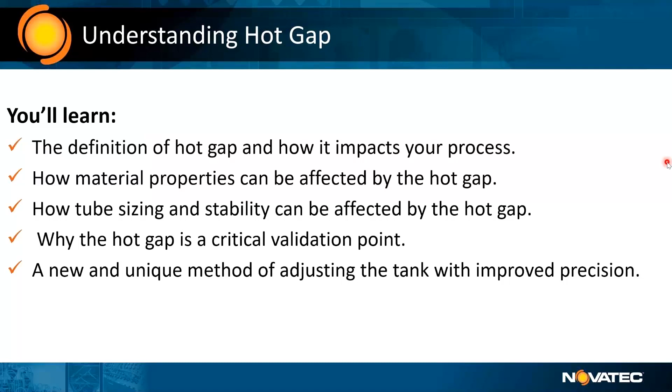Can die sizing or land length affect hot gap spacing? So Larry, when the die land length is longer versus very short, how does that affect the spacing that you might have when we're looking at this gap? Well, the land length will determine the amount of swell that the polymer sees, the memory effect of the polymer as it comes out of the die.

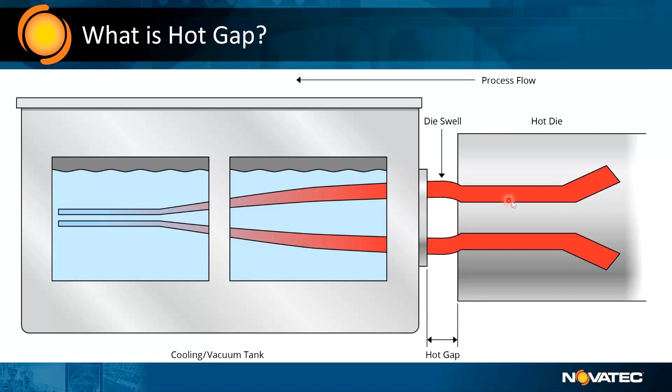So normally there's an acronym that's used called land gap ratio that you would use in your calculations to determine how much land you actually need to ensure that all the other work you did on sizing your tooling will actually work. And again, we all know that distance from coming out of the hot die gap, we've seen people be very close or be further away, depending on the drawdown, the temperature of the plastic, and the material itself.

Well, yes, your die size will determine basically what we used to call an angle of attack. So again, this is one of those things, as I mentioned before, in making this process more of a science.

That's why understanding your material, the temperatures, every part of the die, and thus the relationship of the face of this die to where that tube first enters the water is a critical point. It will set up the properties of your tubing.

So with that, Larry, why don't we really quickly go through some material considerations and whether we're free extruding, non-contact versus contact sizing as far as the distance, what we call this hot gap. Well, your distance is going to be predicated on some of the normal calculations that you see for tooling. So your area draw ratio, your direct draw ratio, as well as your draw ratio balance will dictate what your natural tank position is.

So depending on how you want to set up your process, in a free extrusion, if you want to ensure limiting or slowing down the cooling, you may want to move your tank out further, as well as change your water temperature. Non-contact vacuum sizing is similar in that respect. And contact vacuum sizing, depending on the application, most of the time you want your balance to be pretty straightforward so that you're not using any internal air support. And once again, whatever that balance is will dictate how far out your tank is from your extruder.

And one thing that we know from years of experience, people moving from free extrusion and then going to non-contact or especially contact, is that the tooling will change. The die, the pin and the bushing will be a different size. If you try to use the same tooling you use for free extrusion with a contact calibrator sleeve or plates, that drawdown ratio is going to be different. And not only that, but this hot gap is going to be different.

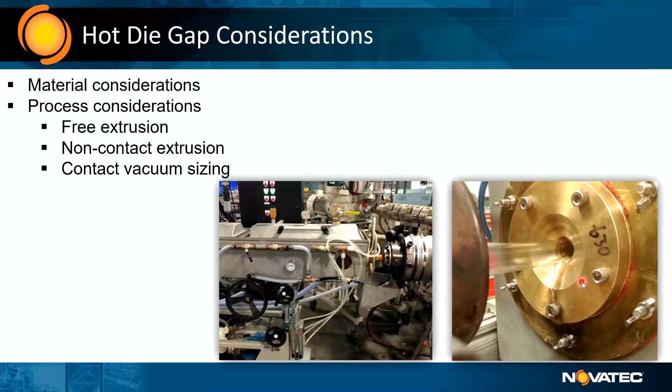In many cases, in calibration, where you're actually making contact between the tube and the tool, the hot gap is very short. Sometimes the face of the die is all but touching the front of the calibrator. It can be, certainly. So Larry's going to specifically talk about the material properties and how this hot gap can affect the elongation, the modulus, the burst strength, whether you want crystalline versus amorphous, and even the tube surface finish, whether it's smooth or matte.

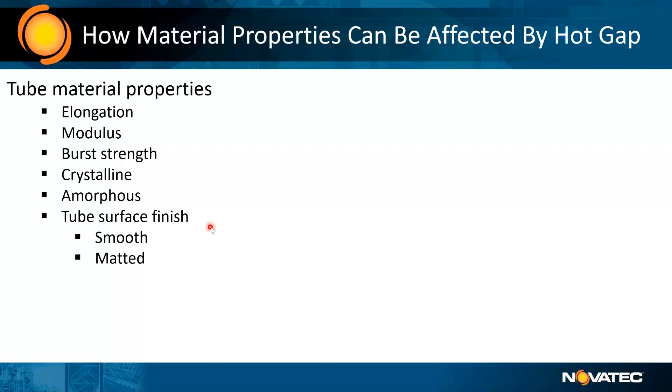Well, in general, the cooling rate is going to determine the elongation, the tensile values and the Young's modulus of the part. So you want to be consistent. You may not even have a specification for it, but you want to be consistent with what you do and what you produce, so that downstream processing doesn't have anything unexpected happening. So basically with elongation, you're pulling it from the die and drawing it down, and the more you draw it down, the better your elongation gets.

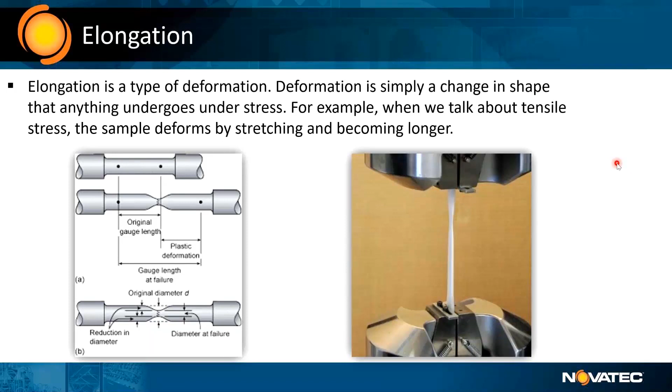Well, the more you draw it down, you can lower your elongation. Okay. You're aligning the molecules in the extrusion direction, just like they would with fishing line. They want a lot of strength in the pull direction. Whereas with burst strength, you would actually reduce that effect and not orient the polymer chains in the extrusion direction as much, so that you get more force applied from the inside.

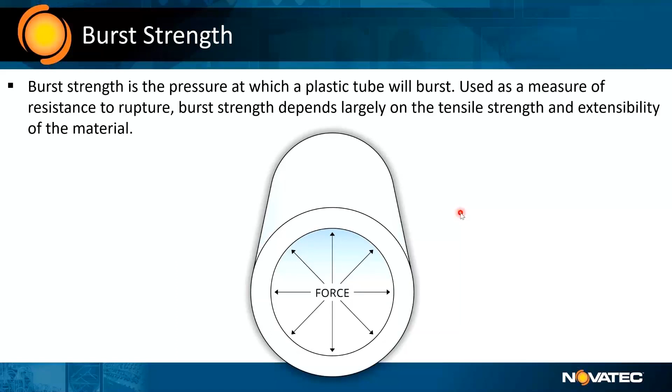So for burst strength, you might want to have very little drawdown and possibly be very close to the die, whereas for elongation, you might be further away. That hot gap is going to be longer. Maybe. It depends on the application. Yep. And then modulus? Well, the area of deformation and the modulus of the tube will move along with the properties. Most people will discuss ultimate, but modulus is not an ultimate value. It takes into account the yield portion of the curve underneath it. So it will certainly affect that value.

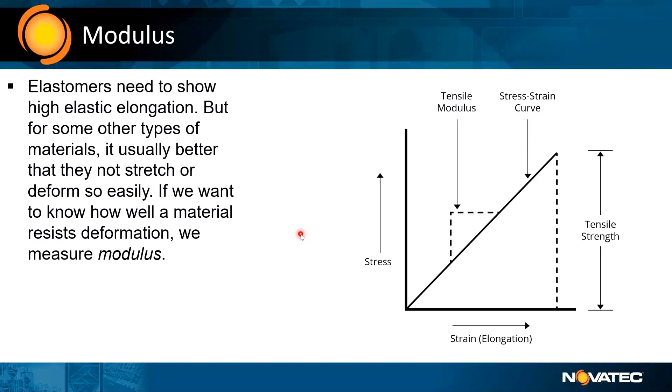Very good. And something that I know is of a lot of interest, especially in some of the materials, some of the nylons, some of the PEEKs. If you could just briefly explain amorphous, especially in medical tubing, versus somebody wanting semi-crystalline. Well, pretty much all the polymers are semi-crystalline, and usually if you wanted to maximize either chemical compatibility or ultimate strengths, you would want to maximize your crystallinity.

And to do that, you slow down the cooling rate. So normally you would have your tank out a little bit further. You might heat the water. Depending on the application, the water might have to be over the glass transition temperature of the material by a certain amount.

And you want to cool it evenly as well. Right. So when somebody is looking for an amorphous material, they might have it coming out of the hot die with the gap very short, and run into the water very, very quickly. So they're not really cooling through the entire wall at the same speed.

So they're almost shocking it. Right. There are a lot of components that are made where, with downstream processing, you'll build in the crystallinity needed. But you need the amorphous state, or more amorphous state, to be able to process them. And again, for semi-crystalline materials, one that really comes to mind is PEEK, and we do have a quick video on the next slide that we'll be showing. It's good to remember that air is 10 to 100 times slower at heat transfer compared to the medium of water.

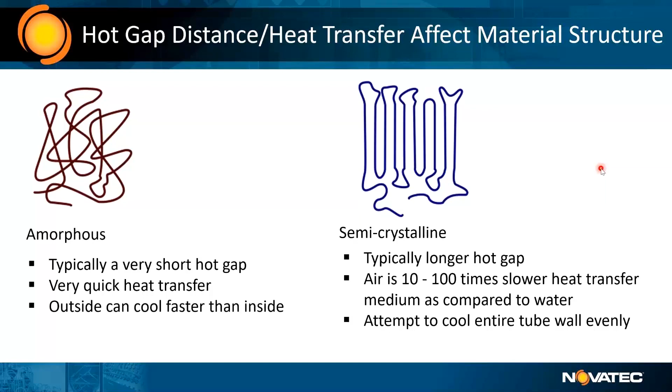So one of the difficulties always comes when we get such a big air gap. That distance is the problem, supporting that part, and controlling it. Yes. So with that, we'll watch a slide, and Larry, if you could just walk us through.

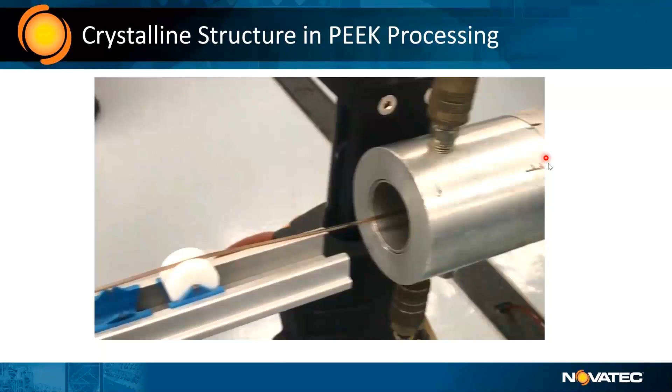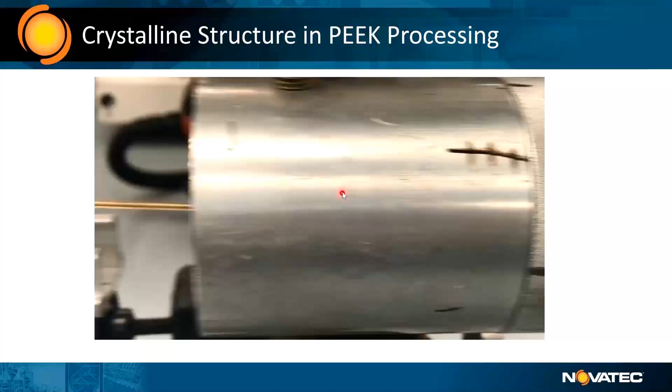This is a PEEK extrusion that is air cooled, and PEEK, luckily, is one of those materials where you can see when the crystallinity occurs, where it goes from an amber to a gray coloration. So this is kind of a normal setup for PEEK. It does make it a little bit more difficult to control when you do this. But look, you can see the frosting, and then see it changes over to the crystalline state. Yes. Beautiful.

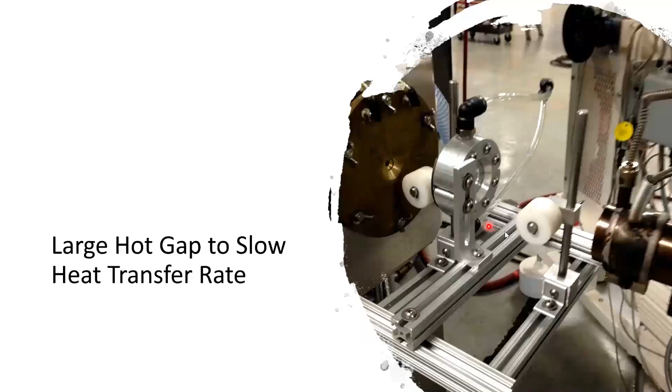And this is more of a very typical setup, might also be PEEK, might be a relatively thin wall, because this gap might only be 10 to 12 inches. And in this case, they've actually put a small air ring to blow some air on it, and some rollers for support. But again, the measurement between the hot die face and the point at which, in this case, it's going into a calibrator, this gap should be a repeatable position and recorded.

Absolutely, because along with the line speed, the amount of time it takes to get to that point, you still need to be in the proper state for the contact vacuum calibration to actually work.

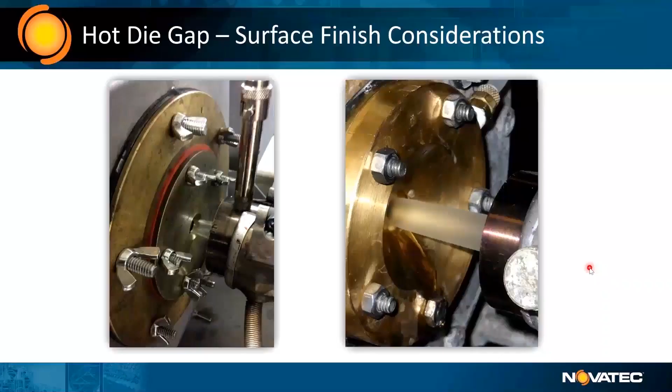And Larry, if you could quickly discuss this gap also, as well as some other things that can affect the surface finish. Well, some polymers, high density polyethylene being one of them, like to actually see some air cooling before it comes into contact. I've actually had some contact applications with high density polyethylene for dilators where your tank could be out 10, 12 inches.

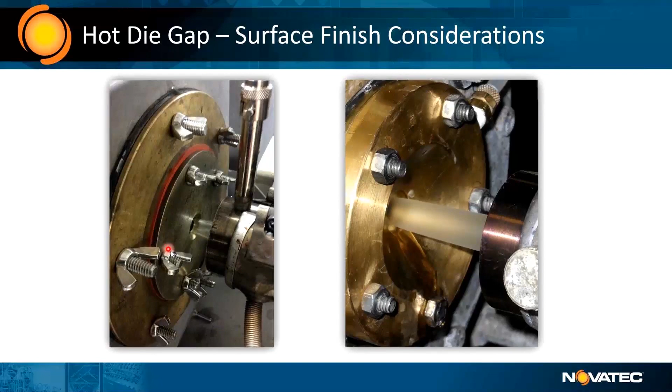Other materials prefer it to be closer, to minimize the air gap, so you're capturing more of a molten state. But obviously, we're concerned today with this air gap in making a measurement, because we want to keep a process consistent and record all these variables. But we know that this is a very important variable.

But along with this, you mentioned to me yesterday that melt temperature can affect this. Absolutely. So, viscosity, melt temperature. Again, the idea is to record as many of the potential process variables as possible. So not just this air gap, but in this case, the melt temperature, the screw RPMs, everything should be recorded.

And Larry, we've talked, and you and I have been working together for at least 35 years. The normal method for moving a tank back and forth, we've talked about how critical this gap is in making medical tubing. Actually, how close do we need to get if we're trying to record every variable, and we want to record and possibly validate what that hot gap distance would be? What would be a typical variation, or how much would you allow? Would you allow 10 thousandths, 20 thousandths?

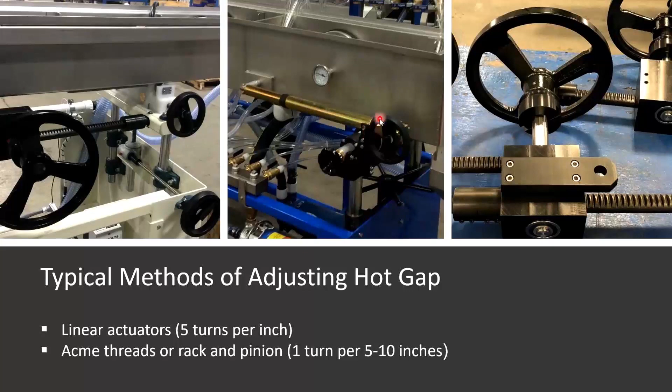So we're going to quickly show you where we think the industry is heading, because we feel very seriously that this just is not accurate enough. A lot of times these handles are wobbling, and you can turn a quarter turn or go the other direction, and there's no tank movement. It's just not precise enough.

So for that reason, we've experimented and actually put on a servo actuator, because we wanted to be able to pre-program repeatable positioning of the tank in reference to the zero of the die. So we know from the face of the tool how far it is and where exactly the face of the die is, where we want that hot gap position to be, and be able to program that, along with a string-up or startup position and a home retract position.

We did actually add a fast retract, and we'll talk about that. So if all of a sudden there was a jam-up, we want you to be able to hit a button located in a good position so it can quickly go back to a string-up position. We don't want people just shoving the tank out of the way. We're doing a precision process here.

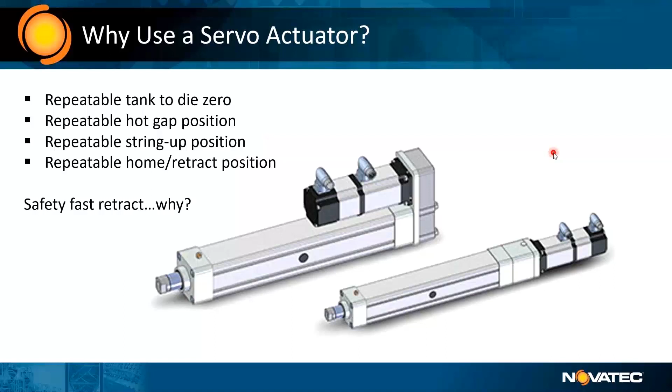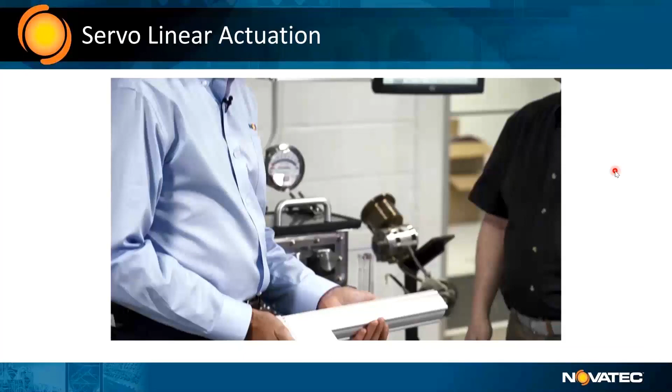5 thousandths, or even 10 thousandths at a time. So we've removed this feature because we felt it was absolutely inadequate, and with that, we replaced it with a servo actuator. So Larry's going to demonstrate how we now move this tank with a servo actuator and not a hand crank.

Sure thing, Bob. Right now, the position it's in is for stringing up, and we have a preset hot die gap. So once you actually string the product up, it's basically the touch of a button, and it moves into your preset die gap.

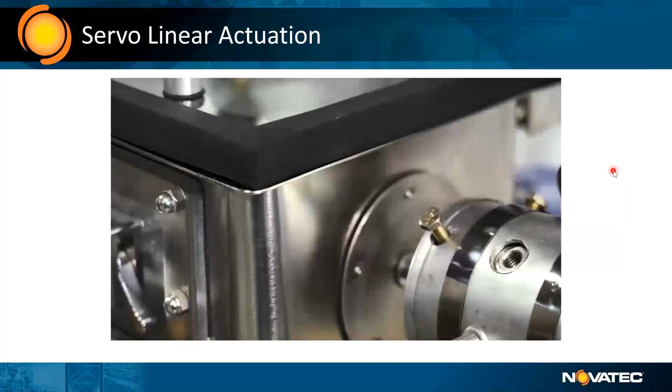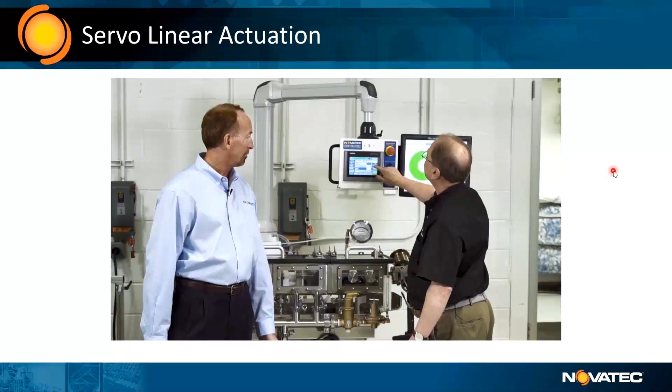You have these three speeds, three increments here. If you want to move your tank in, say, 50 thousandths, press a button. You want to move it back 10 thousandths, press a button. These are all selectable, so each of these numbers on these buttons can be set.

With that, it's just showing you can actually see, because in a lot of cases this gap is going to be very short. In this case, we just put a bolt on the end with a hole, and we're actually using vacuum to hold the water within the tank so we don't have water pouring out. But you are able to attain a position and go back repeatedly within 1 to 2 thousandths every time.

As we mentioned, we do have a fast retract. In a lot of cases, you might have an iris on the front, processing a small microbore tube. And if you were to all of a sudden start to puddle, in the old days, somebody might grab the tank and just shove it back out of the way because you're ruining a $90 iris.

So we didn't want to have to disengage the servo, so we put a button both up on the touchscreen and on the end of the tank. So if you're down at the puller, you hit this button, and it will quickly, at a faster speed, retract this tank away to our string-up position, trying to prevent people from just shoving the tank or bumping it out of the way, which then throws your alignment out. It's just a mess.

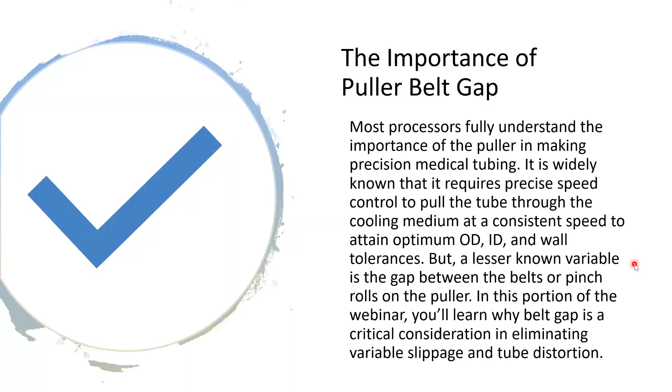But the thing that people have ignored to a point, and we're going to be covering in great detail today, is other than speed, what can we do to the puller to ensure we're making good contact between the belt and the extrudate, getting consistent slippage and having consistent, if not no, distortion. We're trying to eliminate another variable. These are small variables, but they all add up. It's basically using technology to fix a mechanical problem.

Today we're hoping you'll learn how belt gap settings can mean the difference between processing a round tube versus a partially distorted one, how belt gap can affect slippage between the belts and tube causing variable pulling speed, and how different belt materials can affect slippage and potential for bowing, twisting of the tube, and particulate generation. We'll explain why belt gap should become a validation point, and show you a way that hopefully in the future will help correct this variable.

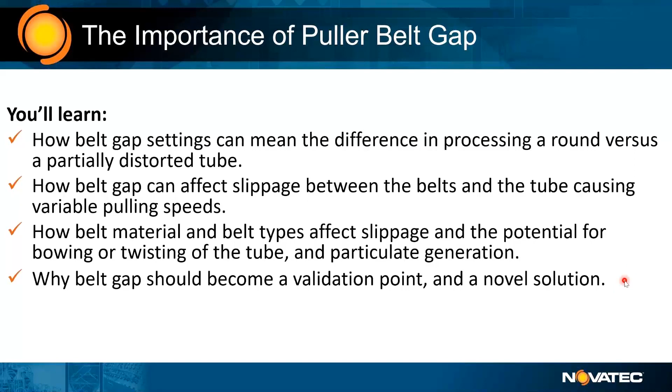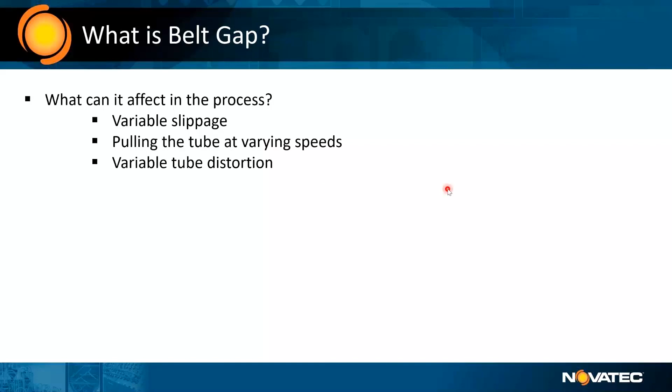With that, we're going to talk about variable slippage and the pulling of the tube at varying speeds, and variable tube distortion, and go into the details with these next few slides. Larry, you want to talk about this, the operator looking at the front of the belt versus the back of the belt.

Mechanically, trying to keep belts parallel, especially as a unit ages through its life cycle, becomes more and more difficult. I've seen a lot of belt pullers with the standard setup where you can visually see the difference in the gap from one end to the other. That creates a lot of problems in the process.

It causes it to bow going through, and what happens is you end up having to tighten it up too much over a short distance, and you also push it into the radius of the roller. So you can have twisting, you can have bowing. I've seen this on cutting applications too, where the part will appear to move side to side and cause jamming once in a while.

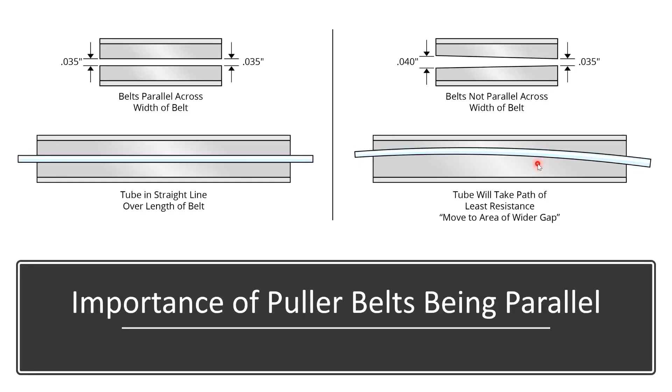Poly V belts have been used for years and years, and the wider the Poly V belt, the teeth don't perfectly match the sheave. This has been a generator of particulate, because the belt will actually grind its way in. You get these little black specks. But in all these pullers, there are adjustment bolts on both sides.

So when tensioning, people need to tension this side versus that side and look through the belt from the downstream end to make sure they are parallel front to back. Yes, they have to, or else you're going to get a twist in your tube. A lot of people may not even notice that, especially if they're running a single lumen tube. With a multi-lumen tube, you should be able to tell.

If you're running a single lumen tube, you could have a twisting motion in that tube, and you're going to change the physical properties of the tube when you do that. And I've actually seen people request a de-twisting feature on their puller, and these two bolts are what they actually consider the de-twisting feature. You just basically adjust it the wrong way. So the Poly V belts especially, it's a thicker belt, and you do have to worry about this.

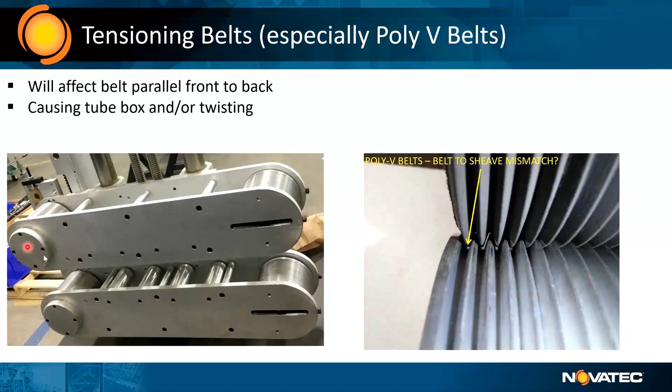So tensioning is very, very critical. We will be talking in a future slide even about the idlers, as far as the position of the idlers in reference to this level, where we may be talking about raising these idlers so we don't have to tension as much, because we don't want the belt hanging down in the middle and people having to over-tension, causing bearings to start creaking. So again, we will specifically talk about that again also.

One of the other issues, Larry, is for years and years, as long as I can remember, most pullers have used round boom shafts with bushings, and they've typically had to have at least 2 to 5 thousandths of clearance, which can actually cause some rocking. So you could actually rock this up and down. When we're talking of making a tube that might be 10, 20, 30 thousandths, if this boom is able to rock a little bit, it could be leaning down a little bit. And again, we're talking thousandths, and that's a critical thing.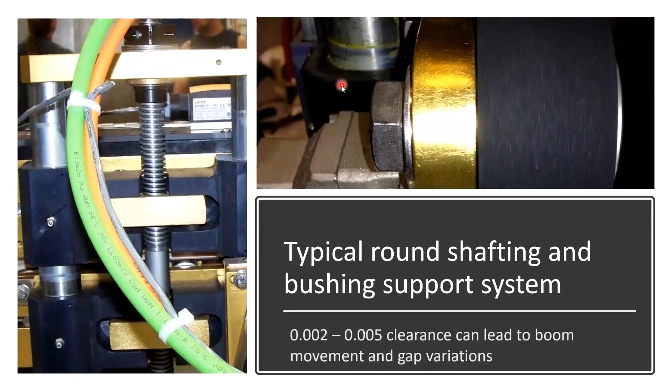So from these bushings, we've gone to replacing them with precision linear slides, linear bearings, because we wanted these to be parallel in both directions within about a thousandth. Because we're making tubes that could have a wall thickness of a thousandth or less. So we've done everything we could to ensure perfect parallelism in both directions.

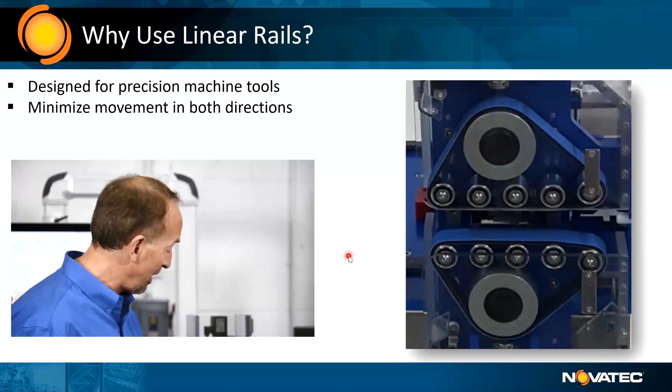And again, I personally have used linear slides as much as 30 years ago, and just recently with Novatec come back to linear slides, because again, we're not trying to produce a product just like everybody else is. We're trying to help our processors make a better tube and be more consistent and be more precise.

So these linear bearings—well, one of the problems that you have with the older style design is somebody could be having a problem with it and not even know it and never be able to solve it. Well, if those booms are sloppy and the things are kind of hanging on a little bit of an angle, they could be trying to tension their belts, not realizing that they've got this rocking condition.

And this is a good slide, and we'll show another one that you can actually see that these idlers—in this case it's the 6-inch puller—these 3 center idlers are actually raised a hair higher than the 2 end rollers. This is done so you don't have that hanging effect, especially over a longer puller over this distance. If these pulleys were all at the same height, you'd have to have it tensioned very tight, and the belt may not actually touch these idlers. If they were at the same level, they could hang down.

And again, if we're making a product with a 1 or 5 thousandth wall thickness and you're trying to barely touch it, if this belt's hanging at all, it's going to affect your process. Especially if you have some portions of the belt itself that have some variation in them. And now what happens is as the belt comes around, it crushes the tube differently.

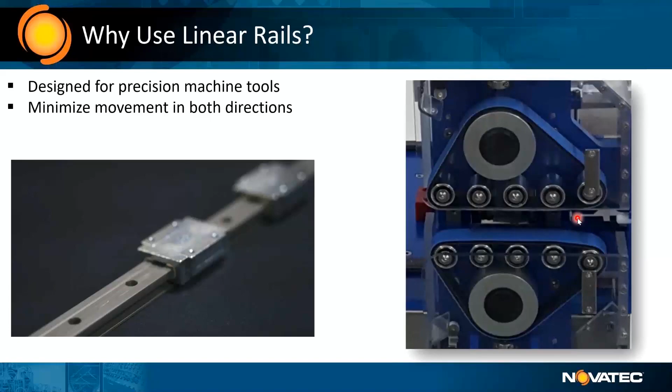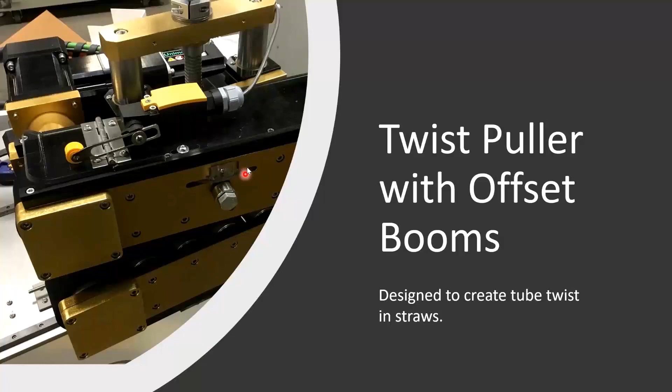So this one does show we want these belts parallel, not only in the length, but from front to back. So we just want to show that. And again, today we're making thinner wall tube, in some cases larger wall. You know, it could be a 300 or 400, 500 thousandths tube with a 5, 8, 10 thousandths wall.

It used to be that microbore was just tiny tubing, but in a lot of cases, the more difficult ones are actually the larger diameters now with thinner walls. This contact pressure is really critical, Larry, especially in stiffer polymers - PET, polycarbonate, PEEK - all could be problematic.

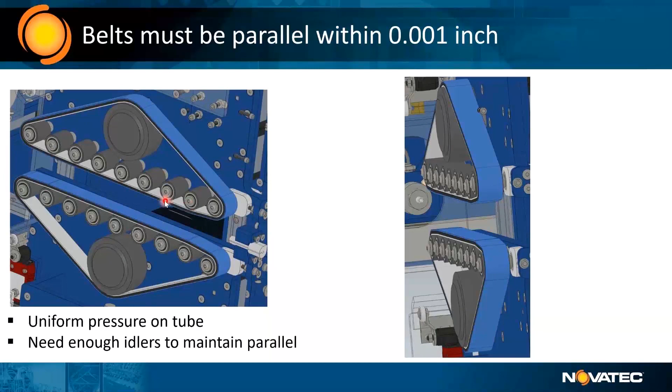So again, we wanted to show, and you can see this is a 12-inch puller. Note that the idlers from this idler to this idler are at a higher distance level than the end rollers. We're only talking about probably 30 thousandths from here to here, but that distance lets you not have to tension the belt as tight. That little bit gives us an even pressure across these and doesn't let the belt possibly sag down. We want it consistent.

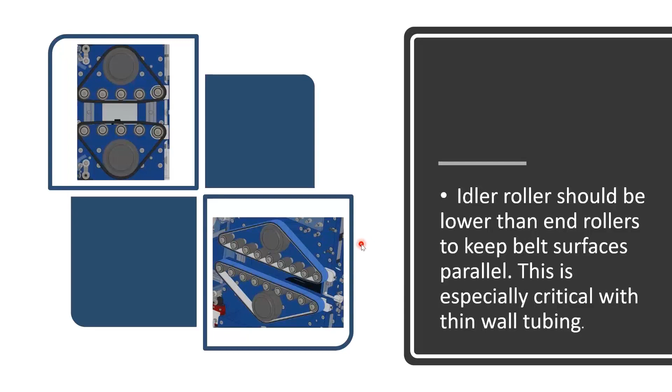So again, we're talking about the idlers, we've pretty much gone through this slide. Everybody will be able to obtain a copy, a link, so you can look at this at your leisure later on. We're also using flat precision ground belts, not poly V, not timing belts. In previous experience with cutting very precision tubing and cutting lengths, we've gotten flat belts in the past, so I wanted to bring that technology to the micro unit. We wanted these to be extremely parallel to offer absolute precision.

With that, we do. So basically what we're talking about here is using a flat belt. Think of a racetrack car with slicks. As we mentioned, flat belts have been used for years and years for high-speed processing of things like straws, cutting pens and swab sticks, or other parts where you needed very, very high cut-to-length accuracy in flywheel mode, Larry.

I've used flat belts for at least 30 years, and flat belts tend to be thinner - you don't tend to get the set. So when you've got this flat belt being very precise, first of all, we can grind them within 1 thousandth, where poly V, about 5 thousandths is the best you can do on thickness, and it's just not accurate enough. So the idlers and the end rollers are all flat, and the belts are very flexible.

And available in different materials. Well, I don't know how many times I've actually seen product get rejected because there's black particulate. And when you actually do your due diligence and find out what happened, you're going to find out that the poly V belt is just spreading debris all over the place.

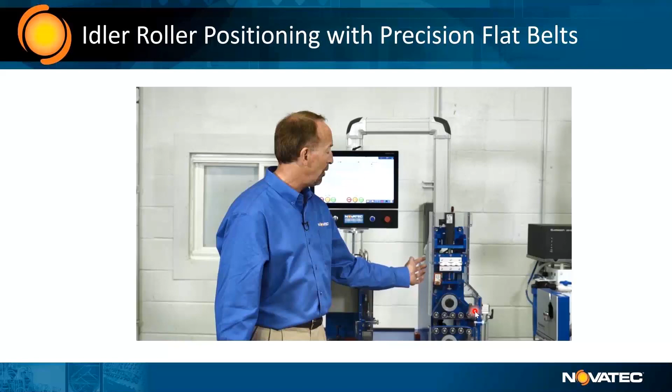So we've talked about the type of belt, the placement of the rollers, the type of adjustment where we're using a linear bearing. You can see how we are splitting hairs, but when we're trying to hold things to the tenths, this is what's necessary, which brings us to the next slide, Larry, where we're talking about now that we've got these belts perfectly parallel, how do we come back to the importance of the actual gap between the belts and how much contact you're making on the tube itself?

Every operator adjusts a crank wheel, and I've seen it change from shift 1 to shift 2 to shift 3. Absolutely, yes - the gremlins of the night shift. I used to call people adjusting the cut length 'crankers' because they'd be cutting in flywheel mode and want the length a little bit longer. They'd actually crank this wheel tighter, a quarter of a turn, and all of a sudden the length got 10 thousandths longer. By understanding that - by having the belt tighter against the tube versus lighter - they tighten the belt, causing less slippage. By loosening the belt contact on the tube, there's more slippage. But I think everything we want you to understand today is that there is always a degree of slippage between the tube and the belt. So that's why we feel this gap is critical.

So now, again, we've got everything very, very parallel. And pretty much the standard method out there for medical tubing right now is using this - in this case, it's a ProScale, where you have a linear scale, it's digital, it reads out, but you can come here and zero it. It's better than nothing.

Well, there's no security on the zeroing of that type of device, and as well, like you said, anybody can re-zero it at whatever position that they want, so you're not going to get a true relative number. So it'd be pretty difficult to validate. Yeah, control. Well, if you can't truly measure it well, you can't control it.

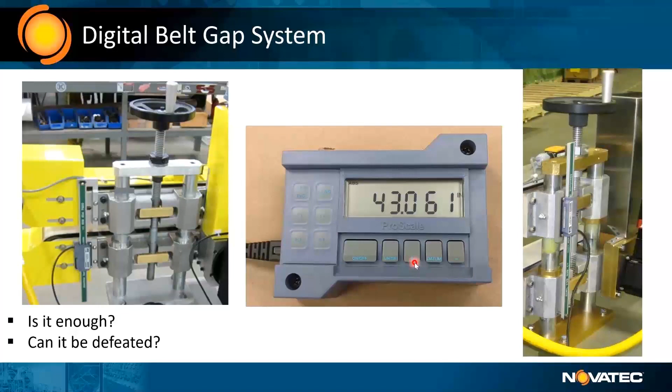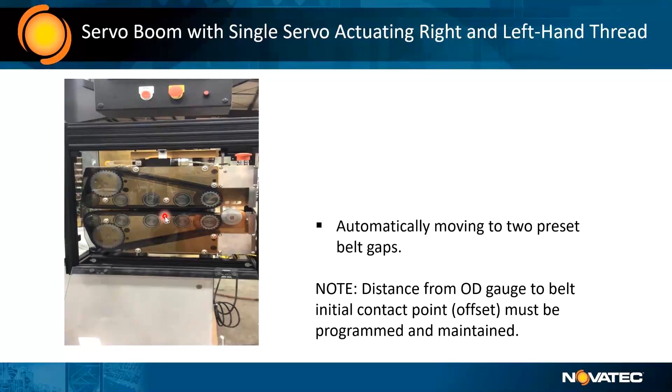Correct. So with that, this is showing the puller, in this case from a previous employer, and this was done probably 6-7 years ago. So this isn't anything new. This has been done where they actually put a servo to open and shut. In this case, it was done for taper tubing, where there were 2 different set points. So it went from one gap to another gap, and there was a simple roller up here with a laser, and basically it told you when you were in the distal versus the proximal. And it was a particular distance from the face, and it would open and shut this and give you a differential, 20 thousandths, 40 thousandths, whatever, but help not to crush it. So this isn't something new.

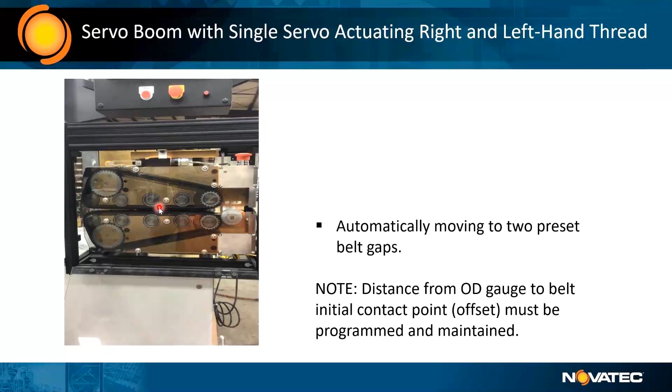It's been around. And what we're trying to do today is trying to make this more of a standard feature. Well, when it was done in the past, you can use servo systems to do it, but the mechanics of it didn't allow for any kind of precision. Right. Not that it was a very precise unit, but it wasn't designed for constant use. Right. This is a relatively new feature. We're trying to make this more of a standardized feature because we feel this gap is critical. So hand wheels are gone. We've actually put 2 servos, and you can literally set what your level from the floor is. So you can set the bottom belt, and then you can go in here through password protection.

And Larry, you were very specific that if we're going to be getting to the point someday where this is going to be a validation point, what this gap is for a particular product, you need to be able to validate, first of all, what 0 is. So we're going to have to provide some type of device, a load cell, whatever, that you would password protect, and somebody would come in and change a set of belts. They could go in and set what 0 is. Well, yeah, it needs to be password protected. You don't want just anybody going in there and playing with the values.

And that's why once you have that, the 0, you could then go in and set, I want a 37 thousandths gap for a 40 thousandths product. You could go back and you could set the actual gap for that product. And that's a starting point. And especially it could be saved in recipes. So when you made product XYZ, you could program in, I want this gap, or I want to start up and I can start at a 10 thousandths gap and just move to that specific point. But now the potential to remove the operator variable is really there.

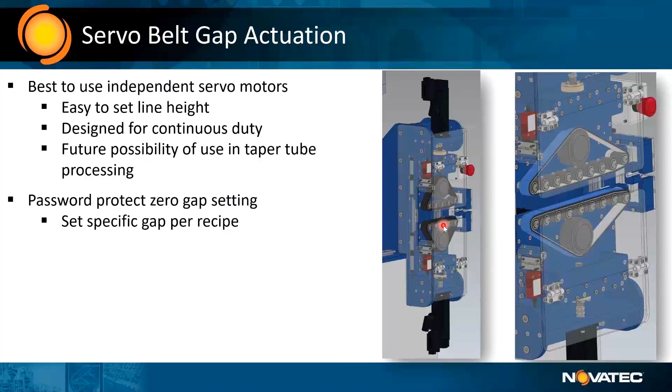One of the things we're talking about is really fully automating where we actually real-time interface with gauging. In this case, the gauge would have to be at a fixed distance attached to the puller, so that gauge point to the initial point of contact with the belt is a fixed distance. We'll call that the offset distance. Once we know that, you could actually say, I want a 5 thousandths differential, or crush differential, so 5 thousandths between the actual tube size and the belt gap. And in this way, this puller gap is going to follow the product. So when you're stringing up, the belts will be all but closed. As the product would come up to size, it would maintain that gap and be extremely repeatable. So that becomes more automatic, and that can actually be part of your recipe.

Absolutely. So this is something new, but it's not new. But here at Novatec, we're going to take that to the next level, and we're going to be working with that and developing that in our lab. And again, it's something that...

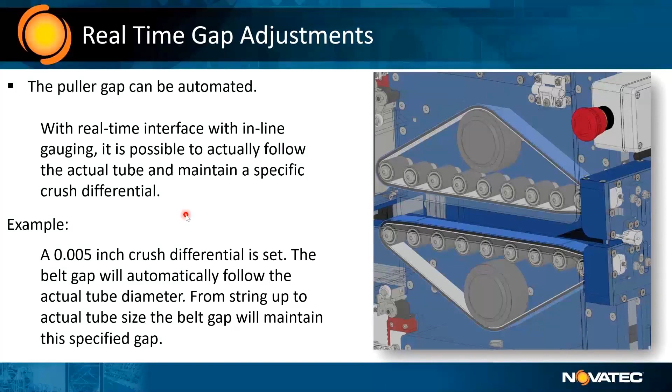Can we make this a validation point? Do you think it's possible, or should it be? Well, you have the option of doing it if it's critical to the component. Yep. So anything that's critical to the component, you should be able to control. Previously, you wouldn't even be able to control it.